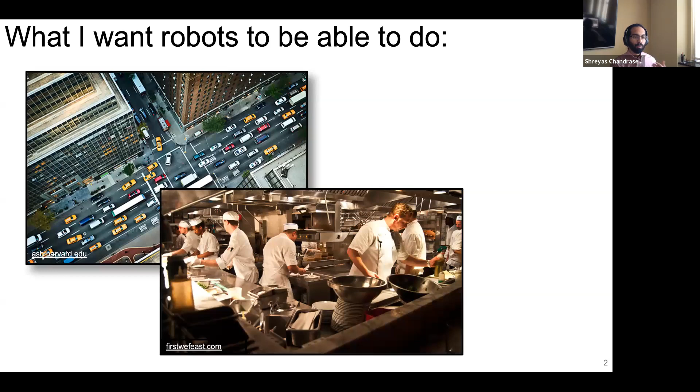And the reason I'm doing any of this is that I want robots to be able to navigate cluttered, complex scenarios like traffic jams, or even maybe a crowded kitchen, where there's a real risk of either hurting the robot itself or hurting other humans. And I want robots to be able to take over jobs that are dangerous or that humans don't want to do. All of these tasks, as far as I can tell, require robots that are in some metric safe.

So we have to specify safety mathematically. And as we're all familiar with, one way to stay safe is to stay home right now. But a robot that just stays home indefinitely will never do anything. So we can't be too conservative, meaning the robot should be live. It should be able to go out and do stuff in the world.

The framework with which I've approached these problems is called receding horizon planning. And I'll use this cartoon drone to illustrate throughout the talk. Note that anything I show you as a cartoon can be translated rigorously into mathematics, but I like to illustrate and animate things for your understanding. I'll also point out if the animations are really laggy - they are smooth on my end, but there might be connection issues. So I've shared the slides with you if you want to reference later.

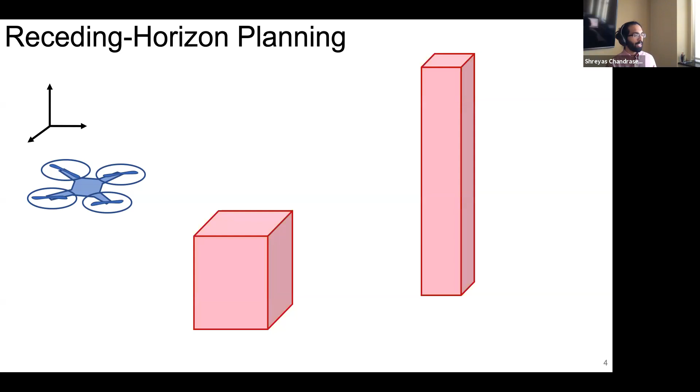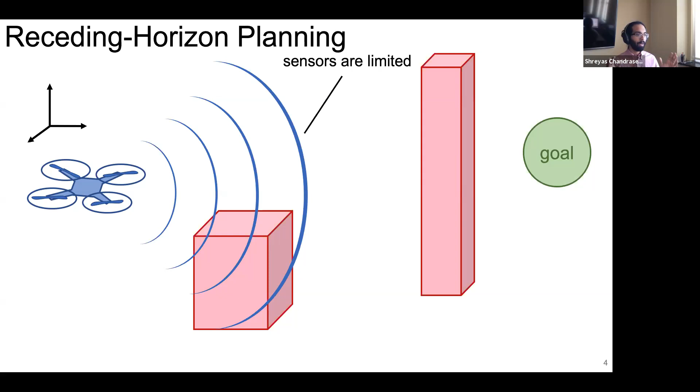So imagine this drone, some obstacles in the world, and then some global goal that we care about reaching. Because the sensing capability of any robot is limited, we typically say it has a limited sensor horizon, a distance away from the robot within which you can see. The strategy is then to plan a short trajectory, and then while executing it, plan our next short trajectory. So the sensor horizon is receding away from the robot. Eventually, hopefully, you can reach this goal location and not crash into stuff.

But as shown in this cartoon, where the blue solid line is the executed trajectory and the dashed line is the reference trajectory, we have tracking error because we can never perfectly plan in real time. To compensate for this tracking error, one naive approach is to say, well, I know what my worst case is going to be - let's say I have Lipschitz continuous dynamics or something like that. And then I just grow all my obstacles by that amount and say, okay, as long as I plan outside these obstacles, I should be okay.

This can work really well for example, a drone flying above a city. But if you want to fly around in a city and really interact near and around people, this may be too conservative. Everything, all your free space might be taken up and you might not be able to find a plan.

There are a few ways to deal with balancing safety and conservatism. And I'll break down how planning is generally approached in robotics. At the top tier of a three-tiered planning hierarchy, we think of a path planner as more or less ignoring the dynamics of the robot, or using an extremely simplified representation, and then trying to really rapidly find a path through the world. So an RRT is a really good example. The output of a path planner is passed to a trajectory planner to generate a dynamically feasible reference trajectory for the robot to track with a tracking controller.

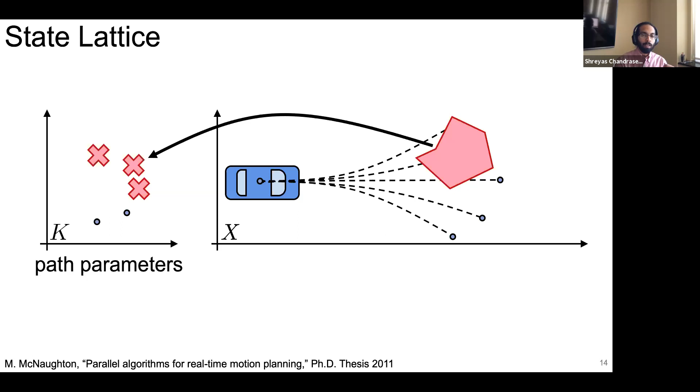So the space on the left contains parameters, usually an n-dimensional Euclidean space. The space on the right is, let's say, the workspace of the robot, X, and these reference paths are the dashed lines. The idea would be to use a very simplified model of the robot, and then when obstacles appear at runtime, you can eliminate paths that are potentially in collision. These types of methods use really simplified descriptions of the robot to produce paths really quickly, which is good for like almost a Google Maps approach for an autonomous car.

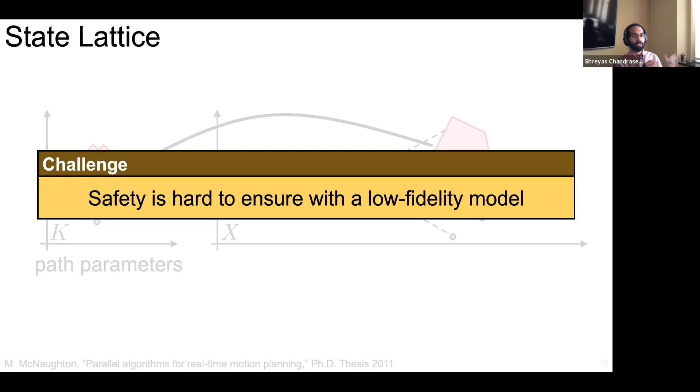But then it's hard to say something about safety when you're not trying to accurately describe where the robot's going to go. In other words, there's a trade-off in how much you want to increase the size of obstacles or respect the dynamics of the robot. That's why typically we want to talk about safety at the trajectory planning level, and that's where my proposed method also lives. A good example actually from MIT is the funnel library approach.

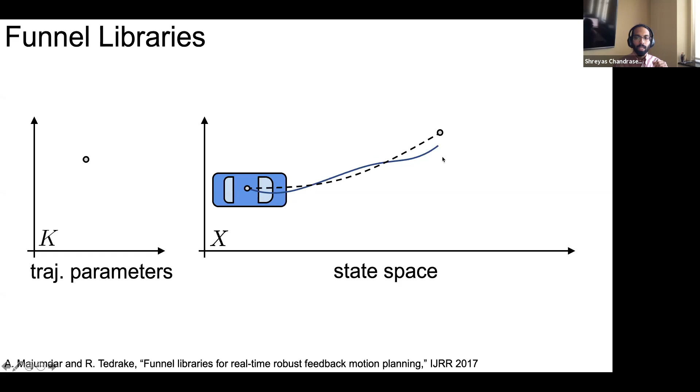So here, the space on the left you can think of as a space of trajectory parameters, and any point in this space corresponds to a reference trajectory, the dashed line, and then let's say that we have some tracking error given by the solid blue line. The goal with this approach is to compute reachable sets or funnels that contain everywhere that the robot, subject to the high fidelity, accurate description of its dynamics, would go despite trying to track these parameterized trajectories.

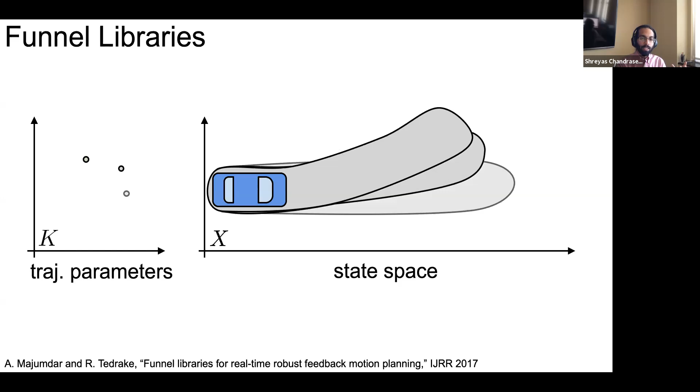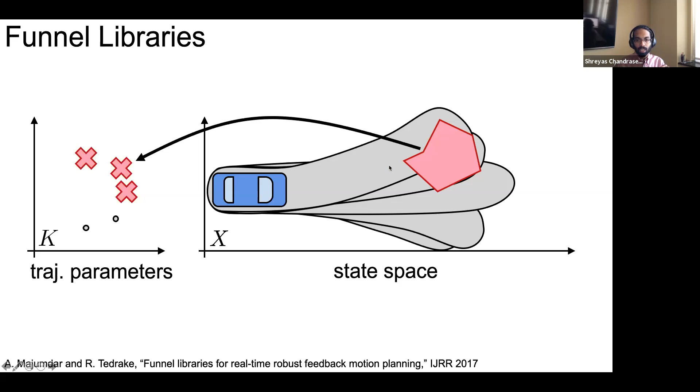Offline, you would do a reachability analysis step to compute a family of such funnels, as they're called. Then at runtime, you eliminate funnels that could cause collisions and select from the remainder. So in this particular instance, you would pick one of these two and know that it's safe. This actually works very well. However, picking a finite library a priori could limit your planning options, especially if you wanted to use this potentially for like a robotic arm or something that's really high dimensional.

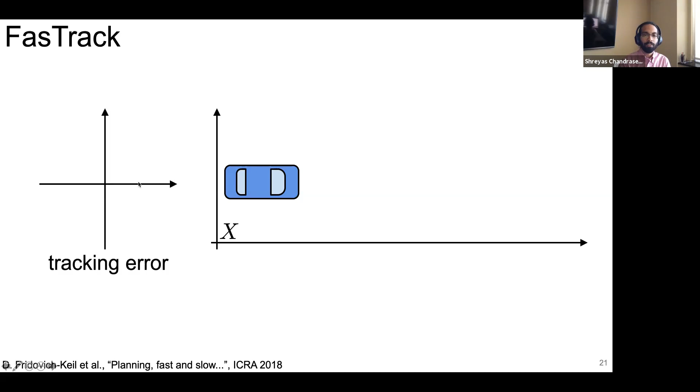Finally, you could let the path planner and the trajectory planner do whatever they want and say, okay, my tracking controller will be safe. An exemplary approach here is called the FasTrack method. The idea is to pre-compute, again with reachability analysis, tracking error, which is going to be this axis on the left, by allowing your planning model to do anything you want, tracing out, for example, a cone of possible plans as time goes to infinity.

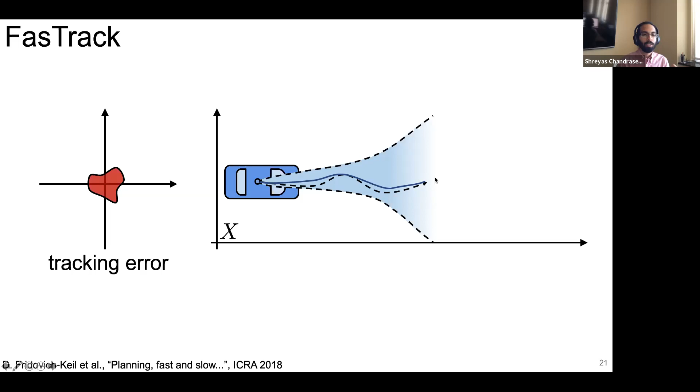The reachability analysis in this method computes the amount of tracking error in position, as well as an associated feedback controller to keep that tracking error bounded if you can choose your model carefully. So here's just one example, arbitrary plan, and then the tracking error stays close to it if you use the associated feedback controller. At runtime, we take this amount of tracking error that we've computed and use it to dilate obstacles. And then no matter what our planner does, as long as it lives outside of obstacles, our car should be safe. This works pretty well as long as you can select your models carefully, but treating your planner as this disturbance that's allowed to do anything is quite conservative, because in some sense your planner and your robot are fighting against each other.

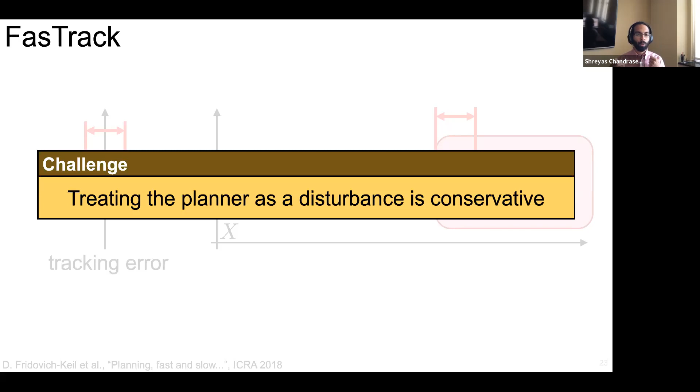So to summarize the challenges here and introduce my method, which is called reachability-based trajectory design: it's hard to say something about safety when you're using a simple model of a robot. It's not impossible, it's just hard. Pre-specifying a finite set of choices might limit what you can do. And then treating your planner as a disturbance can pit your robot and planner against each other and introduce conservatism.

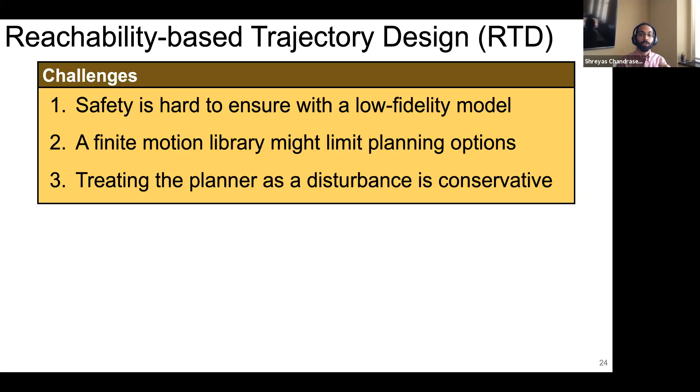My method, RTD, uses a simple model and an error model together to compensate for the fact that a fast model that we can use for planning isn't a perfect description of the robot. I use a continuum of parameterized trajectories, which frees up a lot more options than a finite library a priori. And I use trajectory dependent tracking error so that instead of padding everything uniformly and then limiting free space, the idea is I want to do my padding in the best possible way, in some notion of optimality.

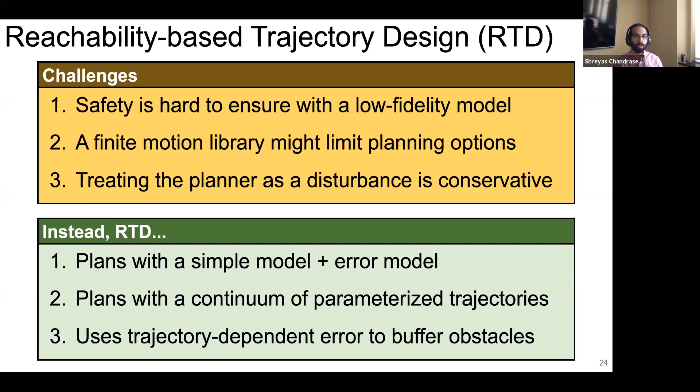That completes the background of the talk. The rest of the talk is a high-level overview of RTD, then a discussion of the offline reachability analysis and the online planning, and then I'll zoom out. Feel free to interrupt with any questions.

Very quick question just about the background. So for FasTrack, you mentioned that you have to choose the model carefully. What are the assumptions there?

There are a few. You can get away with discontinuous things because they have to discretize in their implementation, but to prove anything, they need Lipschitz continuous dynamics. It's tricky because they actually let time go out to infinity, but in practice they discretize, so they just go out to however long.

The biggest, most difficult assumption to satisfy is that your high fidelity model can actually catch your planning model when your planning model is allowed to do anything. That's easier to satisfy for something like a Dubins car, but at least when we were implementing a comparison with that method, what we found is that if you're not very careful about making sure your high fidelity description can catch your planning model, like a cat and mouse game, then your conservatism explodes. It's still safe, it's just that your robot says, I'm not going to move, and it stays still. Luckily, the folks at Berkeley were very helpful and kind in helping us through their code, so we were able to get it working, but it takes some care.

Got it. Okay, thanks. Any other questions?

Okay, so how does RTD work? Let's look at this plot again, and I'll walk through the drone for this whole talk, the quad rotor example, but I'll show you some videos of other robots.

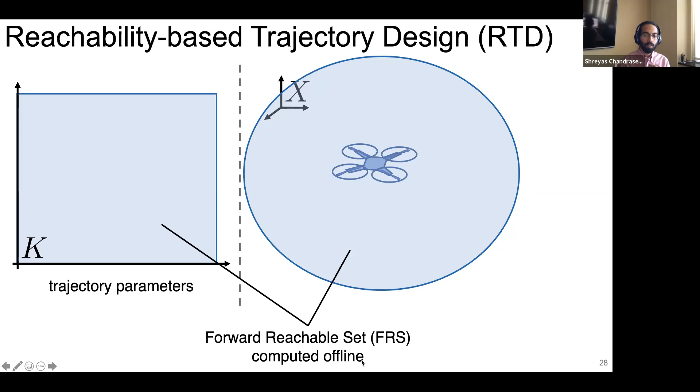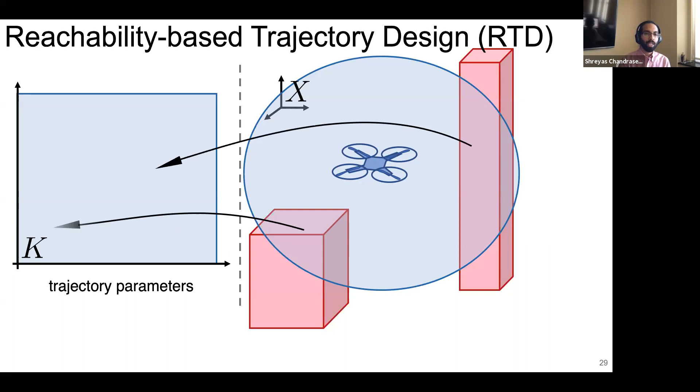At runtime, we'll do the following. Given obstacles, we can intersect them with the reachable set in X and project that intersection into K to find parameter space obstacles. These have to be computed at runtime, because then what we can do is, given an arbitrary trajectory optimization cost function, we can solve a problem like this.

So we want to find the best little k in the space K, given some arbitrary cost, such that we're safe. That's what this means. And the k sub u means unsafe. So this is what we're solving in each receding horizon planning iteration. We'll map these obstacles, solve this problem, and then pick, for example, one trajectory, and know that as long as it's a feasible solution to that program, we're safe.

We would rinse and repeat each time the robot moves a little bit. So solving this program should occur at like 2 to 4 hertz to generate trajectories in practice.

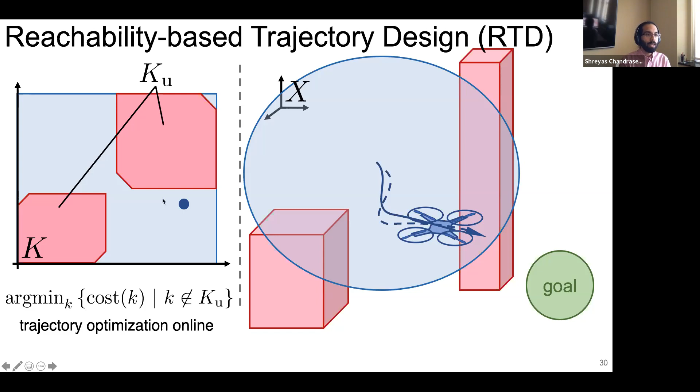So what does it actually look like? Here's a simulated drone flying through a randomly generated forest. Because of the model we chose, we were limited to 5 meters per second, which is the speed under which you can ignore many aerodynamic effects. Over hundreds of such trials, we had 0 crashes and were able to reach the goal quite often, or stop safely when we can't reach the global goal.

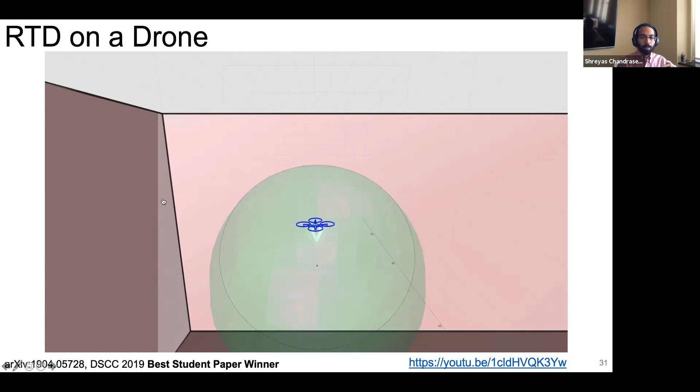We've also begun doing this on hardware. So now you can see our lab, and here's this little tiny Parrot Mambo mini drone. The idea is, and I'll pause the video right when we see the reachable sets.

Here you can see a reference trajectory as a blue dashed line, and then the reachable set is this series of boxes. I'll talk about this representation in more detail going forward.

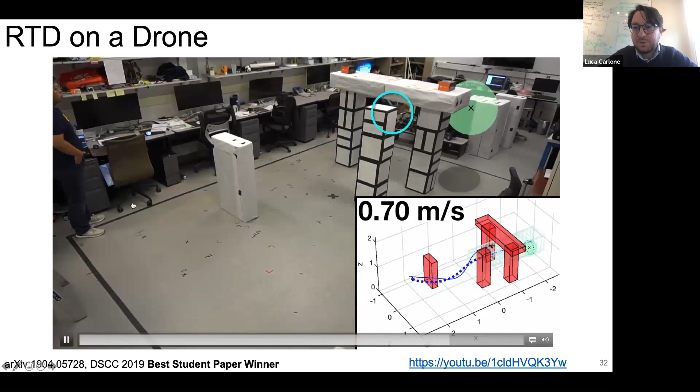One thing—if I can interrupt you. Sorry about that, I have a question on the chat from Hank. Hank is asking, what are the parameters for the trajectory? So on the Euclidean space on the left-hand side of the previous slide, can you give an example of it?

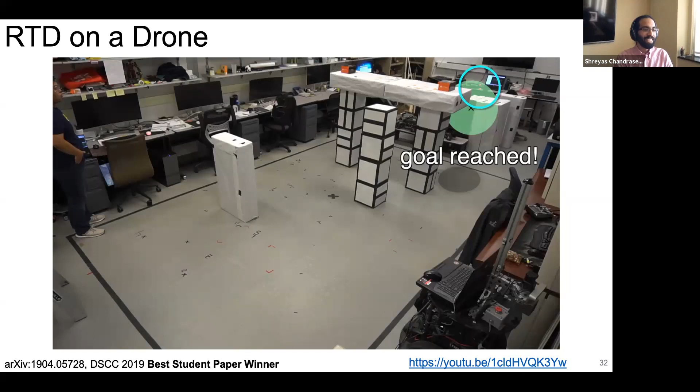Yep, that's actually coming up. This is just to tease you and make you interested with a bunch of videos. I'll show you again the parameters shortly.

So here, just to convince you that this really does work on a variety of robots, here's a little rover in lab. Here's the robot, this is what the robot is seeing, and we've used a planar LiDAR to detect obstacles. This contours the reachable set for the particular choice of trajectory parameters at the current iteration.

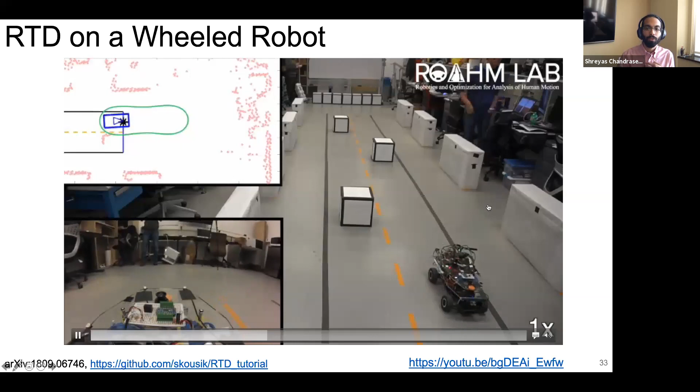And then here's a GoPro mounted to the robot, and the robot is trying to reach this black star. Over many such randomly generated trials, the robot's able to navigate up and down the road over and over. And this is me with short hair, wow.

So, our most recent result—and I know I'm teasing you at this point without showing you what the parameters are—but I'm very proud of this work.

From earlier this year, we have this robot arm under the table, and we're telling it to go above the table. In this case, we deliberately wrote a really bad path planner, so the path planner just tells it to move the end effector, and then it gives it intermediate poses for the arm that are in collision with the table.

I'll show you what one of those looks like right now. So here you can see these black versions of the arm are the intermediate pose. The blue arm is the current state, and then the green blob is the reachable set. And this black arm is living inside the table obstacle.

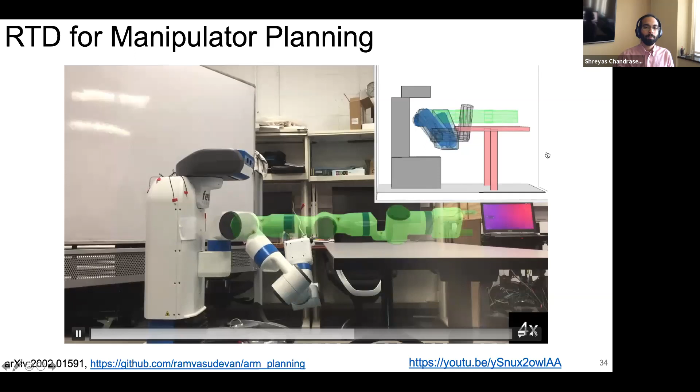Basically, RTD is just waiting for the high level planner to give it something reasonable to do, and trying its best to track these trajectories that are inside the table. As soon as the arm finds a trajectory on the other side of the table, we're able to rapidly get over there without crashing. This is also to illustrate that we're not super conservative.

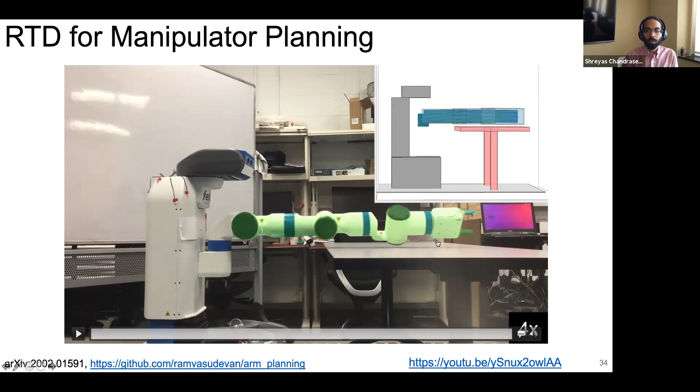All right. Now I can talk a bit about the models we use. This will answer Hank's question of the trajectory parameterization, and then I'll talk about how we do reachability analysis.

For the drone, we use a model that looks like this, which has a position, velocity, angular velocity, and the body frame to inertial frame rotation matrix. We can write down these dynamics, which are the standard 3D rigid body dynamics for a drone.

And really what's important to look at here is we have a thrust input aligned with the E3 or Z axis of the drone, and then a body moment produced by the differences in the rotor speeds.

This can give you a pretty accurate description of how a drone will move through space, but it's very hard to plan with this type of model at runtime, partially because we're evolving not just in Euclidean space, but also on SO3. Here we have a rotation matrix.

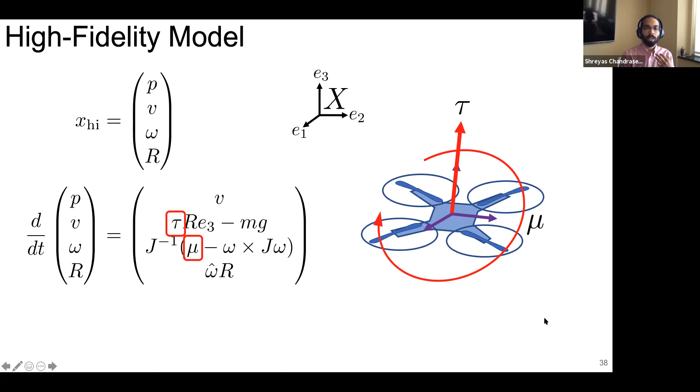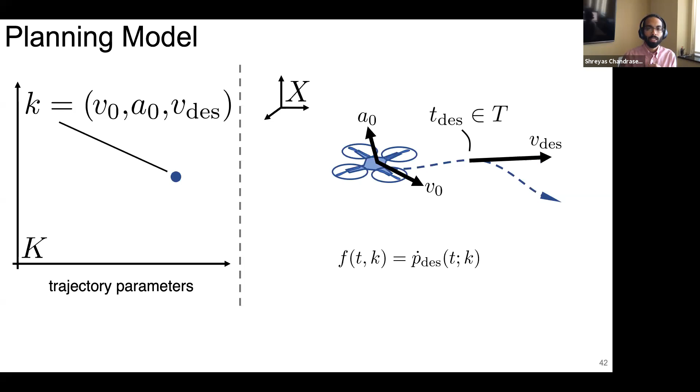The other thing we specify is that our velocity and acceleration at the end of every plan ends in a stop. This way, as we're doing receding horizon planning, if for some reason in one iteration we don't converge to a feasible solution, our previous trajectory ended in a stop, so we can at least begin stopping.

So I hope this answers your question of, in the case of the drone, what is a good parameterization? I'll point out that this parameterization, we found it to be useful for our particular task of navigating these arbitrary obstacle scenarios.

We can use other parameterizations. This particular one, because the drone is described by that nasty high fidelity rigid body dynamics, will become very useful for computing reachability analysis on that high fidelity model shortly after this.

All right, so how do we do reachability analysis?

I have a quick question, Shreyas. If you can go back. So, if I'm thinking about polynomial optimization here, you're giving the initial position, the initial state, the final state, and an intermediate waypoint, right? Is the final state actually the end of the entire trajectory, or are you doing this in a kind of receding horizon MPC style?

I'm not sure I perfectly understand your question. Are you asking if we're optimizing portions of the trajectory? In each receding horizon iteration, it's slightly different from MPC in that we generate the entire trajectory every time, and that's where you could use MPC much more effectively to track the trajectories we generate.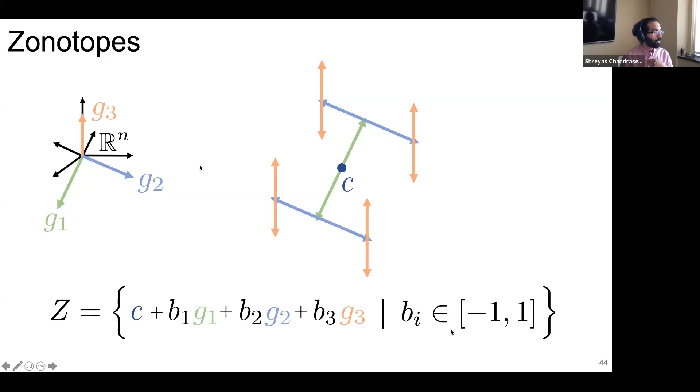So before we dive into the reachability analysis, I'll talk about this object called a zonotope, which is a set in Rn centered at a point C, which I'll call big Z. A zonotope is constructed by the convex combination of this center point C with generator vectors G, shown here as G1. As you add more generator vectors and multiply each one by an interval from -1 to 1, you can trace out a convex polytope. This particular type is called a zonotope.

This object is really useful because on a computer, all we have to hold onto is the center and a generator matrix, which is just the concatenation of the generators. Implicit in the representation is this multi-dimensional interval B, from -1 to 1 for each generator.

Another really useful property is that the Minkowski sum, or set addition, of two zonotopes is the sum of the centers and then the concatenation of the generator matrices. B1, B2 here is just MATLAB notation to keep track of these intervals.

This is really useful because if we can represent our reachable set with zonotopes, we can compute a reachable set for our planning model and for our tracking error separately, then add them together to create a reachable set for our high-fidelity complex description of the quadrotor. So first I'll talk about planning model reachability.

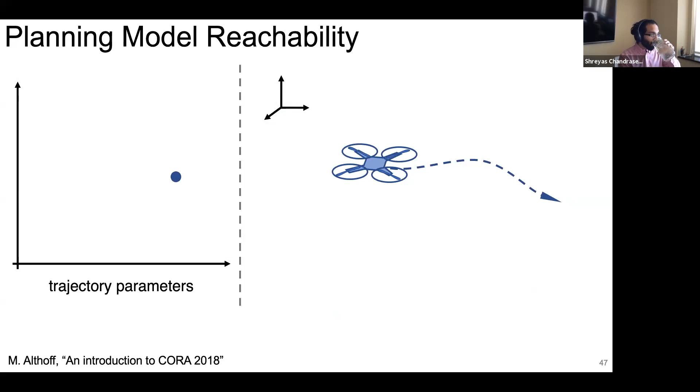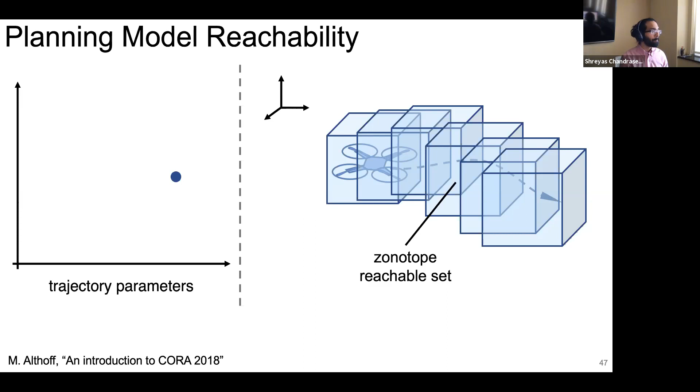The goal is to compute sequences of zonotopes that represent the reachable sets of our planning model. We use an open source toolbox called CORA, and I'll point out a GitHub link later if you want to see some of our code. What CORA is doing under the hood is this, for a single parameter.

Suppose I chose one parameter, and I have Z0 as an initial zonotope, with my time horizon from T0 to TF. We partition time into a bunch of small intervals and compute a zonotope that provably contains the motion of the planning model in each of these n intervals. That looks like an Euler integration step that shifts the zonotope according to a linearization of the planning dynamics, followed by a dilation or buffering to compensate for linearization error.

If I were to plug in the high-fidelity nonlinear model of the drone, this linearization error would explode. But because we use simplified polynomial dynamics for the planning model, this linearization error is actually quite small, and we end up with a pretty tight sequence of zonotopes—the reachable set just for this parameter K star. Again, n comes from this partition of time.

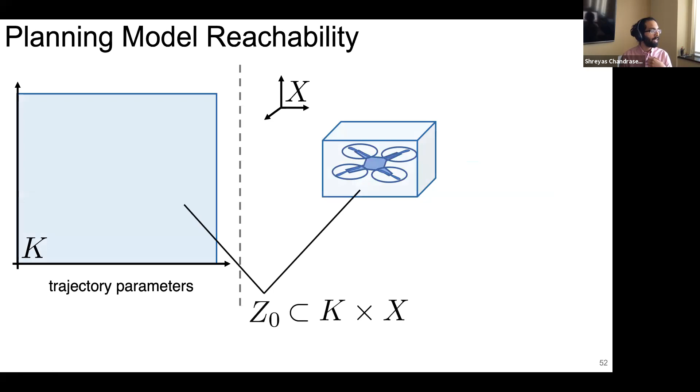But we don't just do it for one parameter, we do it for this continuum. Our initial zonotope is defined as the entire set K and this box around our quadrotor. Then CORA will spit out this sequence of zonotopes—if the animation works, there we go—which is our representation of the forward reachable set we want to use for planning.

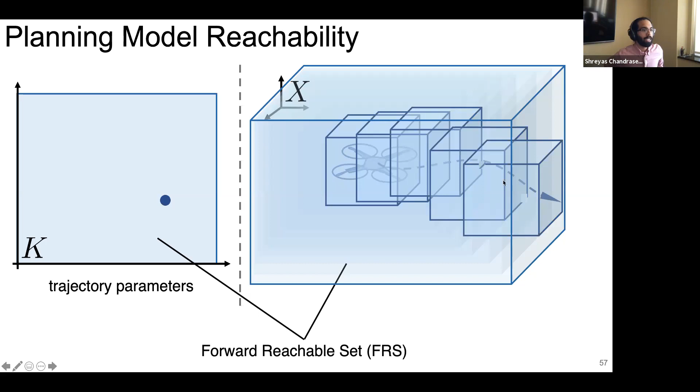One point in this parameter space will back out a smaller sequence of zonotopes, so we can take subsets of this really high-dimensional object and find just the reachable sets we care about. In other words, what you should take away is that we have a reachable set for our planning model, represented as a sequence of zonotopes. Now all we need to do is add the tracking error using that Minkowski sum property from earlier.

So now how do we do reachability for the tracking error? This is quite a lot harder. We have the simplified 3D dynamics plus the 9 dimensions of our parameters, which have zero dynamics. And then we have this really nasty nonlinear model, which depending on how you want to represent a rotation matrix, may be either 9 or 3-dimensional.

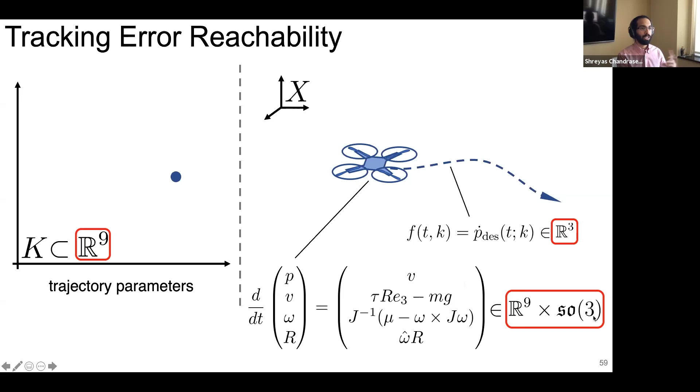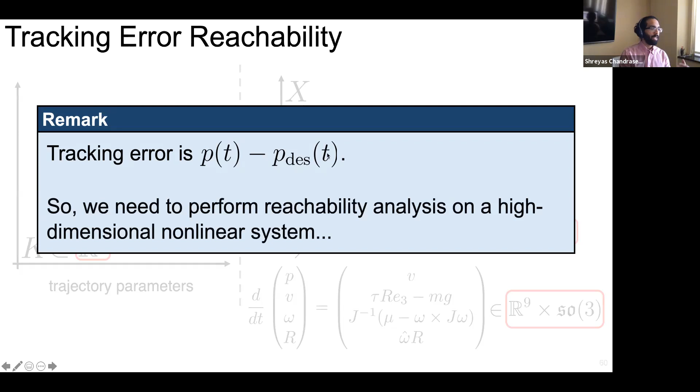So we have to do reachability. These two share the position, but we have 9 plus potentially another 3 dimensions, and time. So that's a really high dimensional nonlinear model to assess. The reason we have to care about the entire model is that our tracking error is our actual quadrotor's position minus our desired position. So we have to perform reachability analysis on a high dimensional nonlinear system.

A common approach to at least give this a shot would be sampling. In fact, we do sampling, but you can't just sample in a 22-dimensional space and hope for the best, because the curse of dimensionality really gets you. So we specify how to choose the samples to compute tracking error maximally.

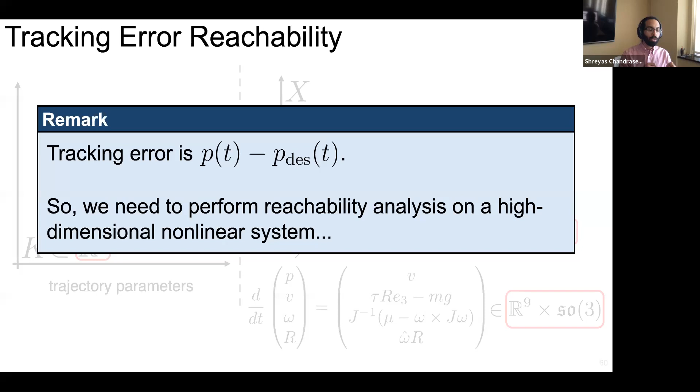That requires a common assumption in quadrotor dynamics: that the rotation dynamics are much faster than the translation dynamics. So the takeaway here is you can point your thrust vector quickly in the direction you want, and then you apply an acceleration that operates at a much slower rate. This allows us to linearize the dynamics to assess where our controller performs the worst.

The tracking error is maximized when the initial speed, or the magnitude of its initial velocity, is at a maximum. The takeaway here is we don't need to use the linearized model to compute tracking error, but we do need to use it to identify where to sample this high dimensional space to make computing tracking error tractable.

This is particular to the drone, but in general, because we're parameterizing our trajectories a priori, we can use properties of that parameterized trajectory space to determine where tracking error will be really bad. For example, for the wheeled robot, we know that a larger change in our desired yaw rate will produce larger tracking error. So we pay a penalty in that we're limited to a parameterized space of trajectories, but we get a big win in that we make computing a reachable set for a high fidelity model much more tractable.

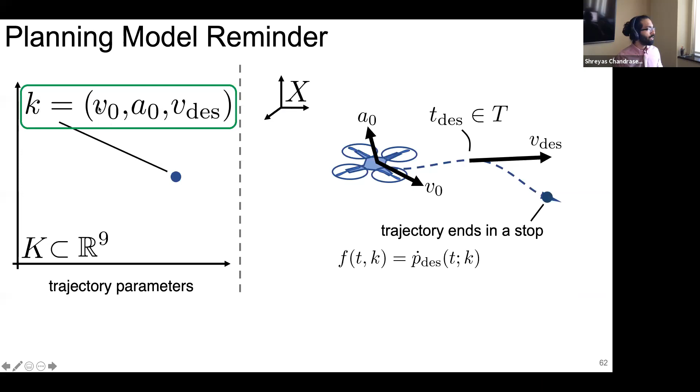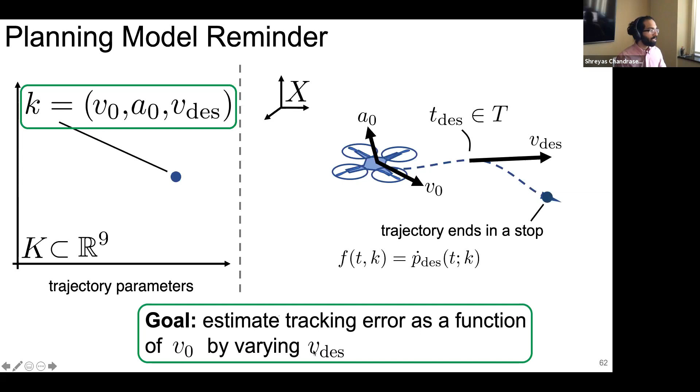Before I go through how we actually do this computation, let me remind you that our planning model has parameters for initial velocity, initial acceleration, and desired velocity at a point along the trajectory, where t desired is fixed. So our goal is to estimate the tracking error, or do reachability analysis on our high fidelity model, as a function of our initial velocity by varying our desired velocity. These are the spaces we're sampling, so instead of sampling in this really high dimensional space, we just have to sample initial velocities effectively.

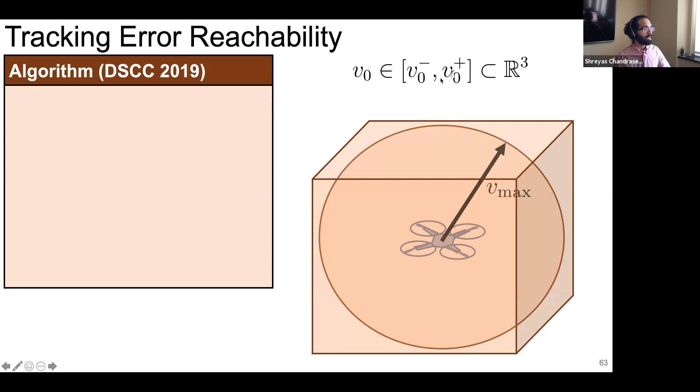To show you how that works, I'll build the algorithm here. Imagine our drone and this sphere of possible velocities with radius v max. The algorithm we want to build starts by over-approximating the sphere with a box. And again, all of these cartoons turn into rigorous math, but I just want to get the point across. This box can be represented again as a multi-dimensional interval with some corners.

So these are bounds that specify the corners of this box. For each of those corners, which we can look at one right now, we can choose samples in our desired velocity coordinate. I hope this isn't too confusing, that these are all velocities you're looking at, not positions—my lab mates were a bit baffled by that. So just remember that all of these yellow and orange objects are velocities.

Given any initial velocity, we can choose essentially a sphere of possible desired velocities that are our initial velocity plus some maximum allowed acceleration times our desired velocity time. Again, we can over-approximate this with the box and then choose the corners of it. This is exactly how we've generated samples to figure out where our tracking error is maximized.

So for each of these initial velocities and each sample, we can actually run forward those high fidelity dynamics and take the tracking error directly, saving a zonotope that over-approximates, or takes the maximum in the 3 spatial dimensions of the difference between our planning model and our high fidelity model. We also index these zonotopes by the time horizon or time intervals used for the planning model reachability, so that we can use that Minkowski sum property.

Are there any questions on this part?

So I see a couple of questions on the chat. Andy was asking, how do you decide t desired, which is the instant of time in which you enforce the velocity?

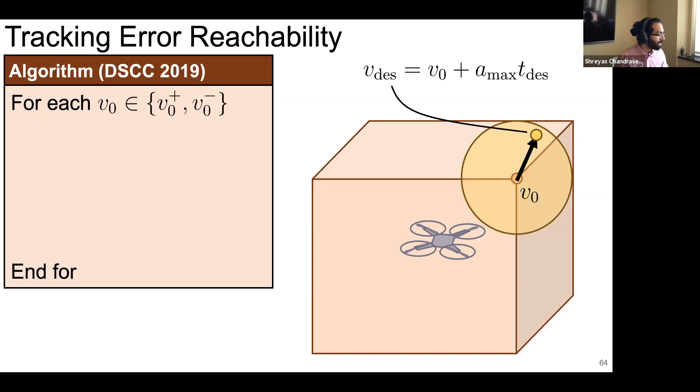Hold on. The big takeaway here is that, suppose our rotation dynamics are much faster than our translation dynamics, then at any moment in time our actual robot, the high fidelity model, is in the planning model reachable set plus the error zonotope. So our actual robot position lives inside our planning model zonotope plus this error zonotope, and that's only a function of our initial velocity.

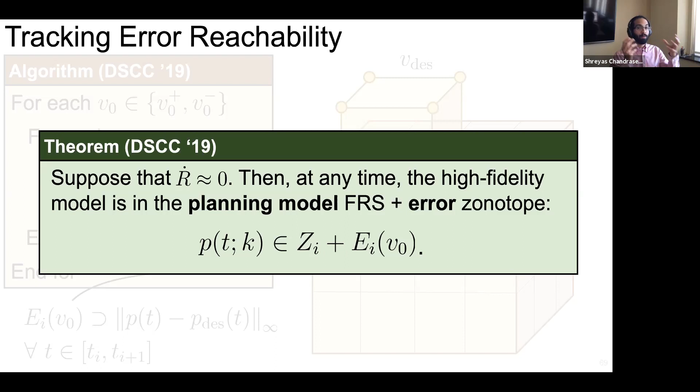In other words, we've taken this really high dimensional system and made it tractable for reachability analysis, and now we can hold on to sets that represent where our actual drone will go. Now we can use these objects for planning at runtime.

First, we want to map them into the parameter space, and then do trajectory optimization. When obstacles appear, we want to identify the set K sub U for unsafe. To illustrate this, I'll show a single time interval from our partition of time, the ith one. I'll also replace this zonotope plus error with Z hat, which is still a zonotope because the Minkowski sum of two zonotopes is still a zonotope.

Now we care about assuming our obstacles can be represented as zonotopes, which is reasonable for voxel grids or octrees or certain convex decompositions of space. Then is this intersection non-empty? If it is, we can project the obstacle into the parameter space and use it for online planning.

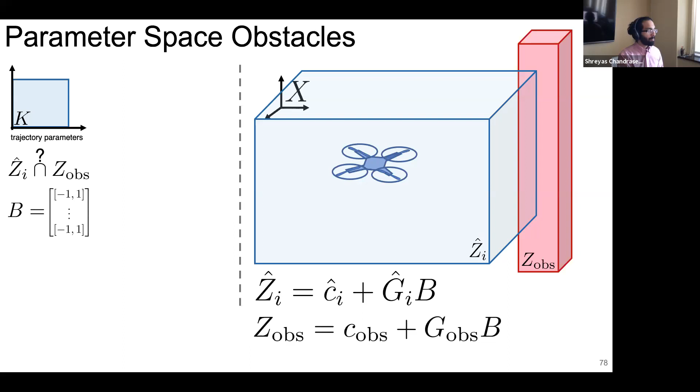I'll start to gather math on the left-hand side for your reference and then work the math on the right. So checking that intersection, recall we can write our zonotope as a center and a generator matrix, similarly with multidimensional interval B, and similarly we can write our obstacle as a center and generator matrix by our assumption.

Then to check the intersection, we can solve this equation for an interval B sub U, again for unsafe, and that might look something like this. So B sub U here is just some multidimensional interval, not necessarily between -1 and 1. Recall that the zonotope is defined by this interval B from -1 to 1 in each dimension.

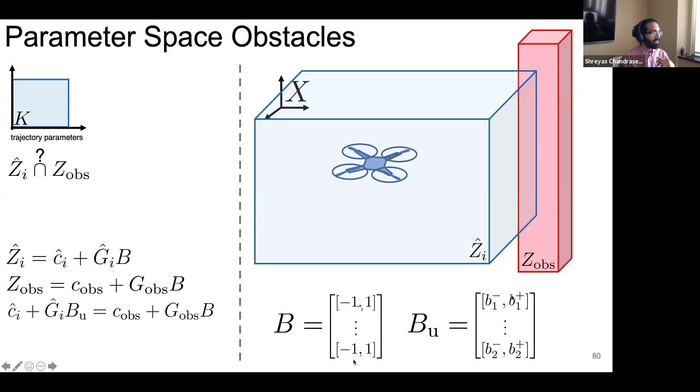The trick here is that we can compute B sub U really quickly with a matrix inverse and then check if these two intervals overlap. If they overlap, then we have unsafe trajectories that we want to avoid choosing from. And that's exactly what we can prove: if we have unsafe trajectories, then these intervals overlap.

The really useful part is that we can evaluate if our decision variable at runtime, or K, is in this unsafe set. That's equivalent to checking if a point is inside a polytope, so checking if the maximum of a bunch of linear constraints is positive. And because we're using polytopes, you get gradients as well, so your trajectory optimization can run really quickly at runtime.

The nice thing is that this intersection of the intervals gives us that polytope. It gives us all the half planes defining it because we have taken this intersection of intervals. Okay, so what does that look like?

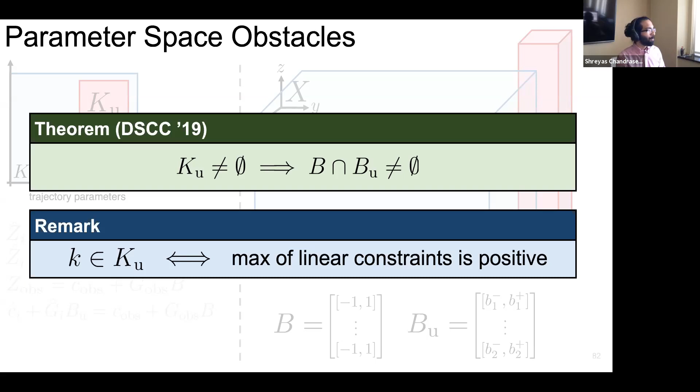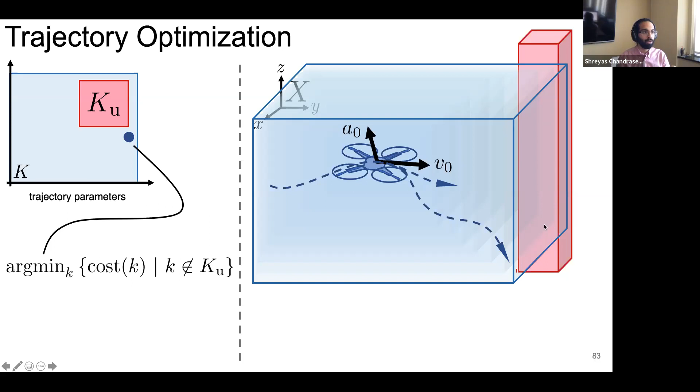Suppose we have our drone and we've estimated our initial acceleration and initial velocity, following a trajectory from the previous iteration. Then suppose we've mapped our obstacle into this space for the current iteration. What we can solve is this problem again: pick a K that's not inside this set KU for some arbitrary cost. As long as we find a feasible solution, we know the actual drone will avoid the obstacle. To make this tractable, we have to assume we can start in a safe position, like hovering, and then the robot will never crash.

This is the big takeaway: now we can say, yes, I can do receding horizon planning, I can generate trajectories, and despite the fact that I can't track them perfectly, my robot is safe.

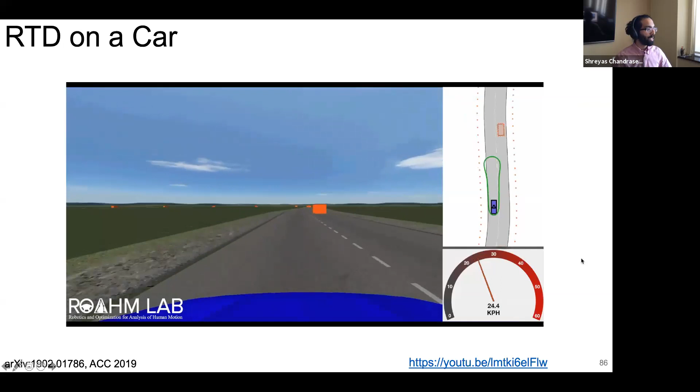However, we haven't done that just for a drone. We've done that for a few different robots. Here is a car simulation of an autonomous car driving around a 1 kilometer test loop at up to about 35 miles per hour, which is just the speed limit of the road. You can see these reachable sets are quite long because it's traveling quite fast. The cost function is saying just go down the road as fast as you can. You'll notice the car slows down naturally to take corners, which we didn't program in — it just happens because the reachable sets are only feasible when you slow down.

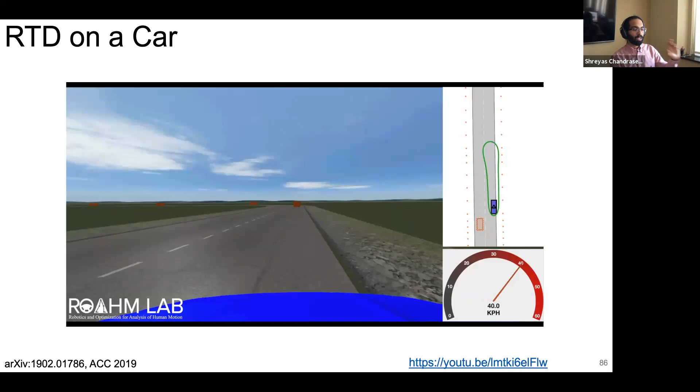The goal then is to drive this test loop over and over, and we did that hundreds of times with no crashes. This is also using a really high fidelity simulator, so it's the closest we can get to reality right now. We're working on the real car.

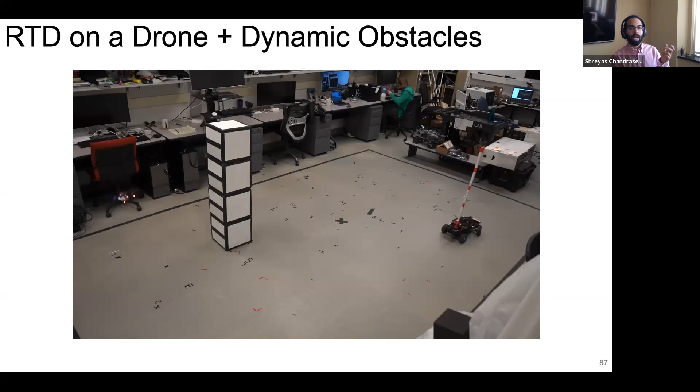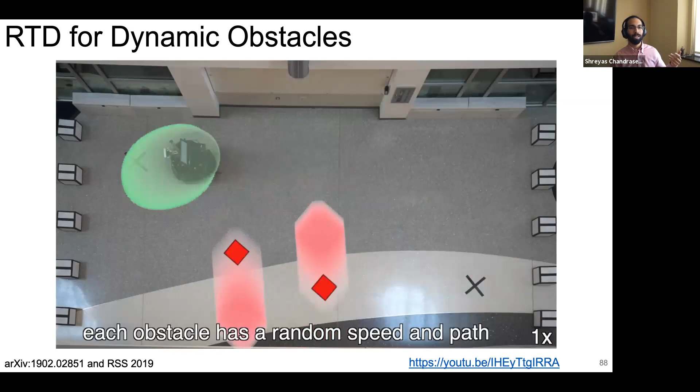To visualize that a little better, here's our Segway robot driving around the atrium of the mechanical engineering building, and we gave it virtual obstacles — we told it where these obstacles are. Despite the obstacles not reacting, so they don't change what they're going to do relative to us and can crash into us if we're not careful, we're able to more or less wait until they move out of the way, because they're being quite mean, and get to the goal reliably.

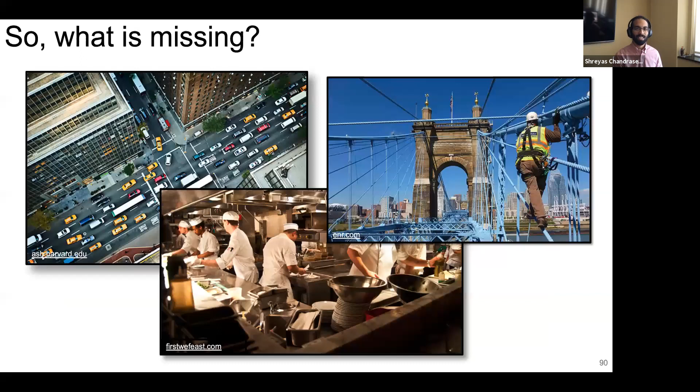Now we're on the way to doing reliable planning in arbitrary environments that are even potentially moving. But there's a huge part of this I haven't talked about. In all of these scenarios, what's required is that the robot correctly senses the world around it. I've only talked about how we plan. So what I really want to do, and what I need to learn more about for my own satisfaction, is how does the robot perceive the world around it? I'm pretty confident on the planning part — I can generate plans that will not crash — but this is the question that's left to answer.

A few things I'm starting to work on that I'm curious about are safe mapping, moving away from these deterministic descriptions of our robots to do reachability in a data-driven way, and then using the fact that, as a controls engineer, I can say this is the representation I need for safety, and using that to guide how a perception algorithm operates.

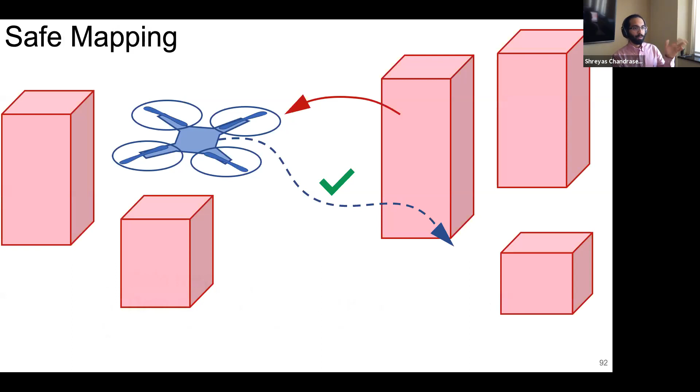I'll do one slide on each of these, but the big takeaway with RTD is that we don't need a global map to ensure safety. We just need to know what's immediately around the robot, and then we can create safe plans. This allows you to arbitrarily switch out your path planner, and ideally you can trust the robot will be safe and send it out into an unforeseen environment. My dream demo here is to point a drone at a forest and have it fly perfectly through the forest on the first try.

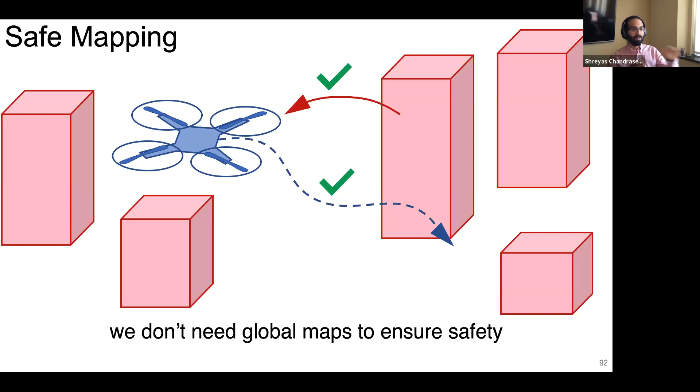Throughout this talk, I've assumed that we know the model of the drone, but that's not always true, especially as the battery changes or thrust changes. So I really want to soften the boundaries of these reachable sets and use robust statistical methods to understand exactly how much risk I'm willing to tolerate.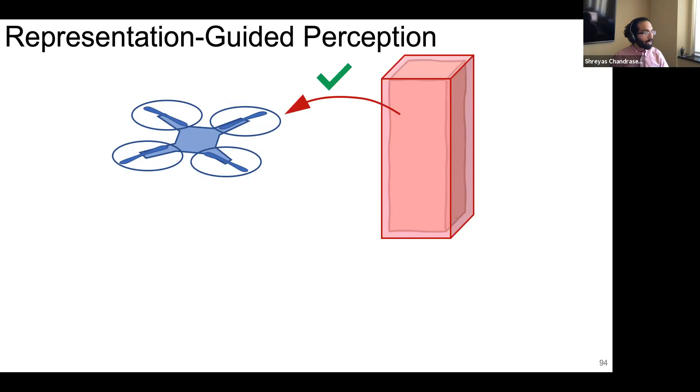And finally, imagine we had some arbitrary obstacle, and what I've told you so far is that we need zonotopes, right? Often you can generate zonotope-like objects, but more broadly, what my research has done is specify some minimum amount of information I need as the planning engineer to tell you that your robot is safe. What I'm excited to learn about next is how do I generate that information and not waste any computational resources on anything else? I want to generate the least amount of information needed to complete my task.

With that, that wraps up everything. And actually that was a little bit faster than usual, so I must be talking fast.

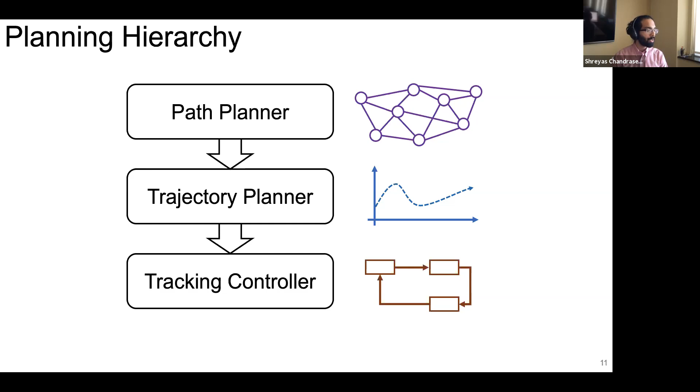A clarification, which I think is useful also when you started showing results with moving obstacles—can you clarify what happens offline and what happens online here? Yep. In the sense that, imagining we are doing perception with our algorithms and getting this map in real time, can we just use this real-time map to implement your algorithm? Yes.

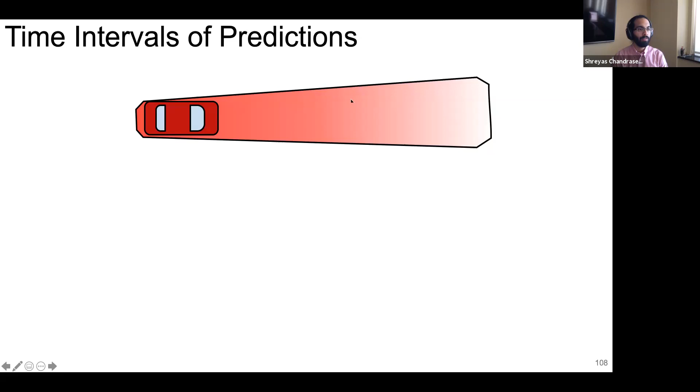So what happens offline is basically this: we compute a reachable set over several time intervals. Here's a cartoon for a car. Then what we do at runtime is, given a prediction of another occupant of the world, we split that up into matching time intervals. We compare, treating the obstacles as static in each time interval, and then all the math that you already saw applies. So the only thing that has to change is how you hold on to time in your reachable set. Does that answer your question?

It's just a slight change to the reachability computation offline, and then an assumption that the predictions at runtime are correct, meaning—can you comment on the computational cost of these two phases?

Yeah, so for the robot car, this is a bit more expensive than the static case because we have to hold on to time. However, it has been tractable for those wheeled robots. For the zonotope representation, it already partitions time into these intervals, so you actually don't pay any penalty offline. At runtime—and this is partially why I've moved to the zonotope representation—

if we're not using the zonotope representation, we have to turn our obstacle predictions into a bunch of discrete points. Each of these discrete points becomes a nonlinear constraint for our online optimization. So if we don't use zonotopes, this can explode in the number of constraints, which can really slow us down. However, for the zonotope representation, because our predictions are already defined over time intervals by assumption, the only difference is where the obstacle is relative to our reachable set for each time interval. But the projection into the parameter space is exactly the same, so we don't actually pay a computational penalty in that regard.

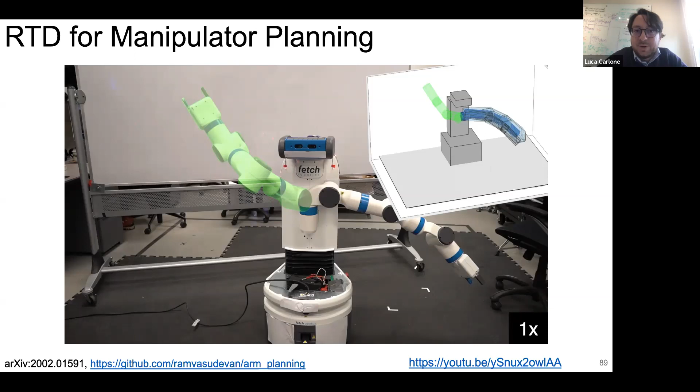So definitely. I think it's the same difference within local reactive planning, let's say potential fields, and global path planning, right? You can avoid local obstacles, but with local reactive approaches you may get stuck. Yes, for example, you just get too conservative and you're stuck forever in front of an obstacle rather than realizing you have to plan over a longer horizon. Right, so any comments about that?

Yeah, in some ways we've solved that problem. Part of it is that, as I mentioned, we're sitting at that trajectory planner level, and so your path planner is allowed to do whatever it wants. So you could run an RRT that completely ignores the dynamics and can find, if it knows a map, a globally optimal solution if you're running RRT star eventually. But then you're trusting RTD in our case to track that global plan reliably. So in that case, for global optimality and reaching a goal, you do need a map. But like you're saying, for local reactivity, you don't.

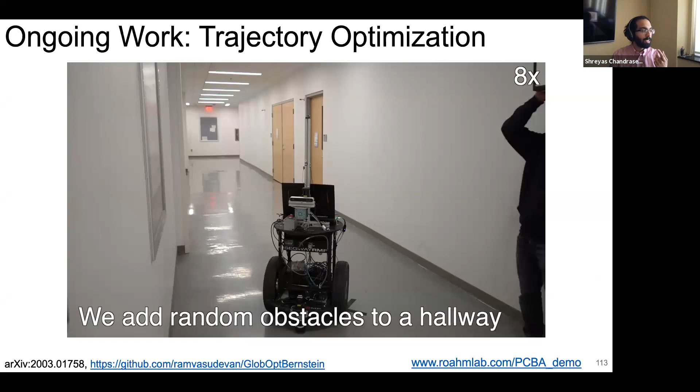One way we've addressed this is, I'll show this demo that compares. Here is the Segway robot, and it is tasked with driving to this black X over here. We are solving the trajectory optimization at runtime with two different methods. One is fmincon in MATLAB, which always gets stuck in local minima.

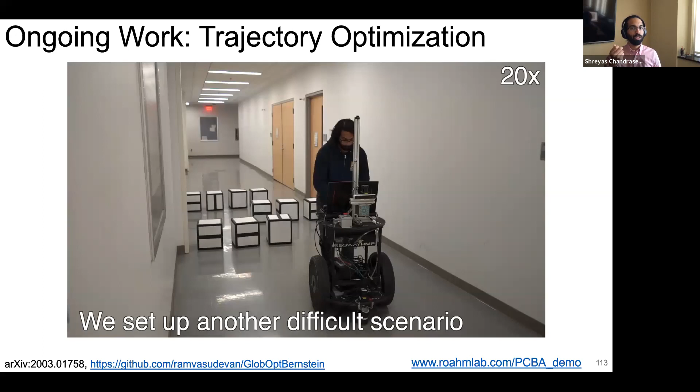But as long as fmincon converges to a feasible solution, we're at least safe. And then the other thing we've implemented is a Bernstein algorithm that can do branching and bounding of a polynomial optimization program to find a provably optimal solution in finite time. That means we can solve faster and always find the best solution. I'll show you what it looks like on the robot.

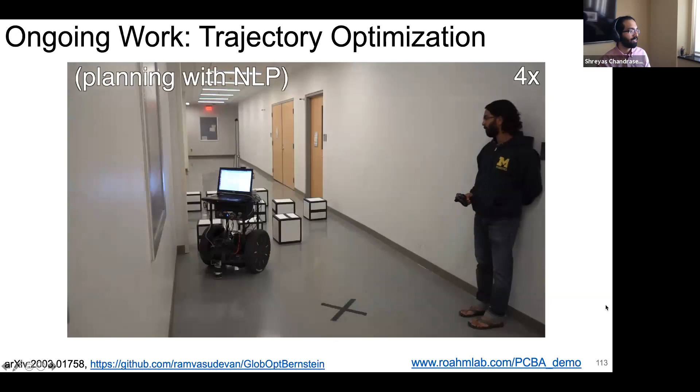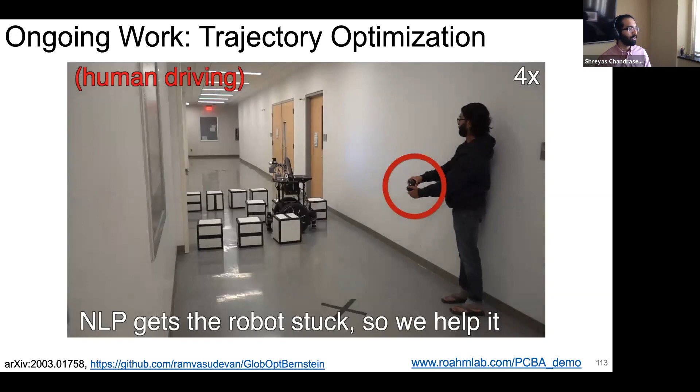So here's planning with fmincon, and it just does a really bad job. The robot doesn't crash, but it immediately gets stuck, as you can see. So I have to actually drive the robot. Here I drive it out of this local minimum. The reason it's getting caught is that the cost function is bad, in the sense that it's just minimizing the distance down the hallway. So as soon as it hits this wall, it's like, I don't know what to do.

We switch to our parallel constrained Bernstein algorithm, or PCBA. This is the first take, and I didn't even pick up the controller, I just did it. So this is from our trajectory planning side, how we're solving this problem. But I think you have to bring both things together. You have to consider the global map if you care about reaching global goals, and then you have to pick the best trajectory optimization solver that you can.

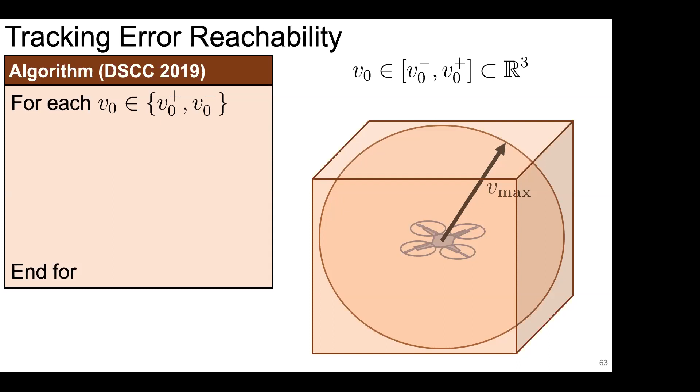Correct. So what we actually do in practice is we chop up that box into many small boxes, and it takes about 30 minutes for what this ends up being, which is actually a lookup table in MATLAB, and it takes about 30 minutes to solve for that high dimensional model. But what we do is we split up the initial velocity box into a bunch of little boxes, and then at each little box, each corner, we take all these samples.

Okay, so is it guaranteed that sampling only the corners will guarantee you don't miss any arbitrary corner points? Right, and we also, the thing I didn't show is that we bound everything by the maximum velocity and maximum acceleration. So we're not actually doing the full box, we're bounding everything.

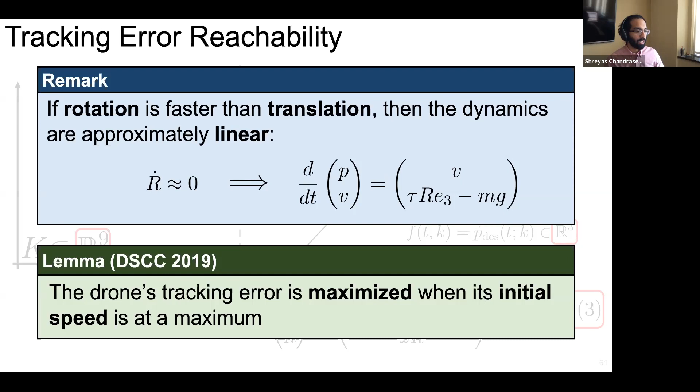The reason it works is because if our rotation dynamics are faster than our translation dynamics, which is generally true for these types of robots, we can show that our tracking error will achieve a maximum given our trajectory parameterization by choosing the largest initial speeds. So if I take this little box where V naught is, and look at the magnitudes of all these initial speeds, I know the tracking error will be largest at the corners of this box rather than anywhere inside it. Does that answer your question?

Yeah, but how conservative is this with the zonotope representation? Because by using zonotopes, you over approximate your reachability zone, and you also over approximate your obstacle. In this case, I know it's guaranteed to be safe, but how conservative is this? Are there cases where over approximating will lead to no solution, but indeed there might be a solution? Is there any case like this, or how do you mitigate this issue?

The way we've mitigated it is by discretizing your initial velocity space finer, giving more resolution, and more chance that if you achieve a slow initial velocity, your error will be much smaller. So this is like a trade-off between performance guarantee and computation.

But have you all thought about, instead of using zonotopes, there's work that defines obstacles using something like polynomial equations, which is cheaper but can be more accurate since those aren't just polytopes. I think it's by Brian Williams' group, a postdoc there, Ashkan, I forgot his name. They use semi-definite constraints or other polynomial constraints to represent these uncertainties. Will that help with this?

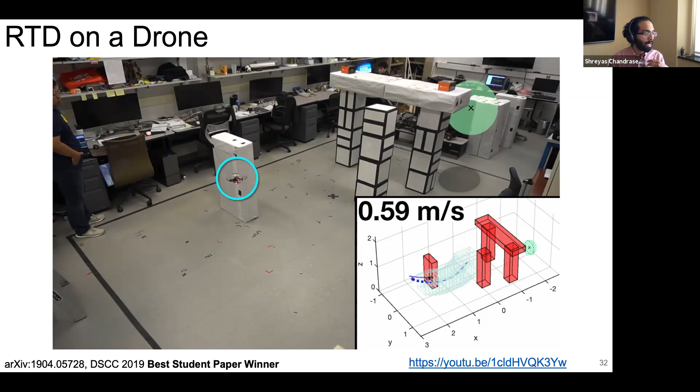We found that the zonotopes are less conservative. For all the wheeled robots, I didn't talk about this, but we solved the offline reachability using a semi-definite program, and it spits out— here's, don't worry about this stuff, this is what turns into an SDP. What we have is points and parameters that turn into a polynomial that is greater than or equal to 1 when you'd have a collision according to that parameter.

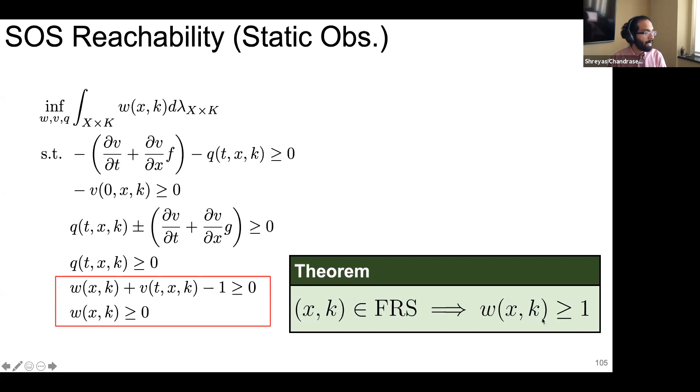At runtime, like I showed you, we turn an obstacle into a bunch of points, and then we can evaluate our polynomial W on each of these obstacle points. This becomes a list of polynomial constraints produced by a sum of squares polynomial spit out by a semi-definite program, just to give you context that we've explored this idea too. The conservatism tends to be higher in this case because these SOS programs tend to be quite conservative in how they estimate the reachable set of the robot.

The other way I want to address that is the data-driven reachability idea. I think we can use clever statistical methods to reduce the size of the zonotope where we know we're not going to actually explore the space. Suppose our drone is flying and we're collecting data about what moves it made, then we know how bad a job it did in practice, and we can update that lookup table we computed offline to compensate for the fact that maybe our tracking error isn't as bad as we thought. So it's a more dangerous trade-off in the sense that you'd immediately abandon safety guarantees, but you'd directly address conservatism by adjusting your reachable set at runtime. SOS programming doesn't let you do that, at least that I've seen.